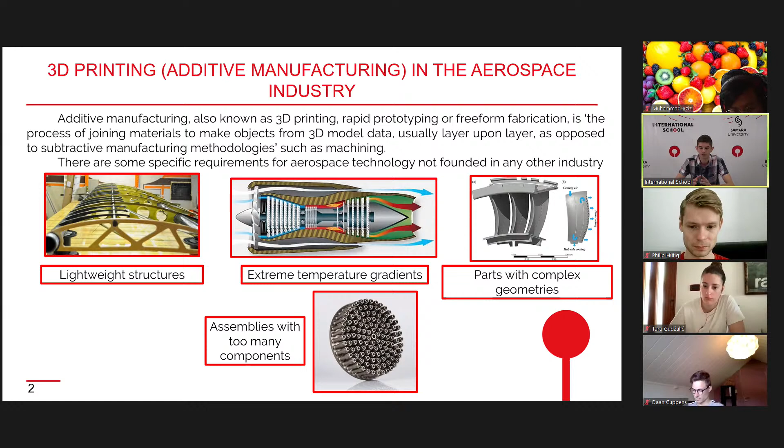Another usage is in the rocket industry or rocket engines, for example assemblies with too many components, like small nozzles for the rocket engine.

Additive manufacturing provides us freedom in component design and lets us fabricate very complex details, complex components or 3D geometry. Following this, complexity can be easily achieved - some features like thin, deep channels and cuts using this technology. In terms of geometry, we can create different types because our 3D model can be divided into small layers, and layer by layer we can create any complex form.

Parts consolidation: traditional manufacturing parts require joining together, but now they can be integrated into a single printed part. For example, if we want to create a nozzle for a combustion chamber, it can be created by traditional technologies, and this detail consists of 3 or more parts. With 3D printing, we can join these parts and create a complex whole detail using this technology.

Fabrication steps consolidation: nesting parts that require assembly in multiple steps can be printed as a simulation. What does it mean? We have special programs to simulate the process of 3D printing - later maybe I will show you this kind of program.

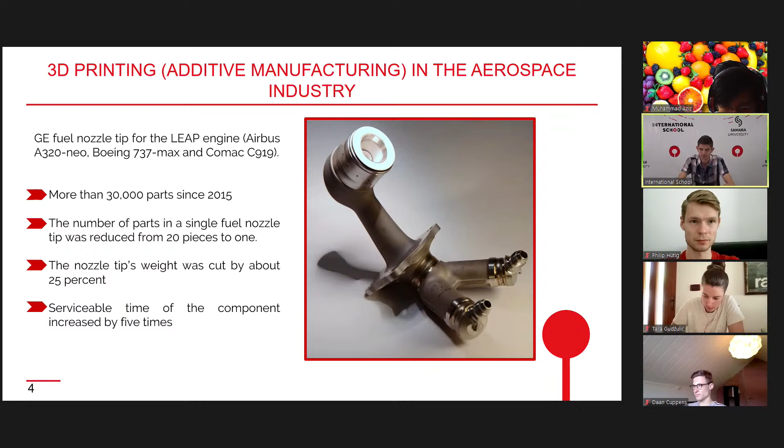Also, the serviceable time of the component increased by 5 times. It means if we want to change a part inside this engine, it will be easy because we can just take out the broken part, print it again, and add it to this engine using 3D printing.

In the rocket industry, maybe you've heard of Firefly rockets. They're using this technology to create combustion chambers for the rocket jet engine. And as you told Philip before, SpaceX also uses this kind of technology.

If I remember, in 2019 they created a combustion chamber for the Crew Dragon spacecraft, and they tested it last year. They tested it, and in April last year, they sent the crew to the International Space Station.

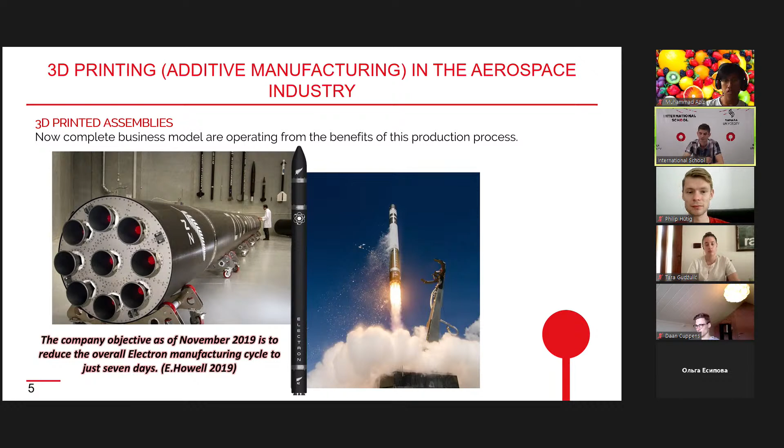As you see, this company SpaceX is progressive, everybody's talking about that. Elon Musk, yes, he's a professional businessman. And as you see, he also found something interesting in 3D printing and uses this kind of technology in his company, because it's advanced technology and useful for this kind of industry, for rocket engines, for example.

In SpaceX, for example, it's totally different from rocket engines that were created 30 years ago. Nowadays they are more complex. Here, the cooling system for these jet engines takes about 3,000 degrees Celsius during the process of burning. That's why we need very strong and innovative materials to create this combustion chamber.

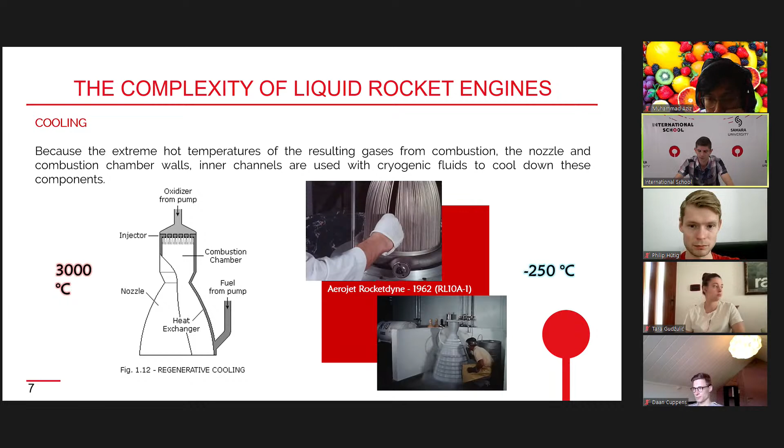Now technology doesn't stop, it improves itself, and now we have 3D printing. Here you see some injectors for the rocket engine. On the right side of the screen, you see our Russian-made rocket engine with a combustion chamber, its name is RD-108, rocket engine 108 in translation from Russian.

Injectors use high pressure gradient, corrosive fuel, and oxidizers, with precision holes. It consists of hundreds of individual components, and the materials are anti-erosion. You see here very tiny, complex injectors on top of the combustion chamber that's used.

Here from the left side you see traditional technology, made by CNC machines. Again, it looks advanced for today's technology. Even so, I am not saying that all manufacturing has been transferred to 3D printing. No, they're still using CNC machines because they're useful to make a useful roughness on the surface of each component.

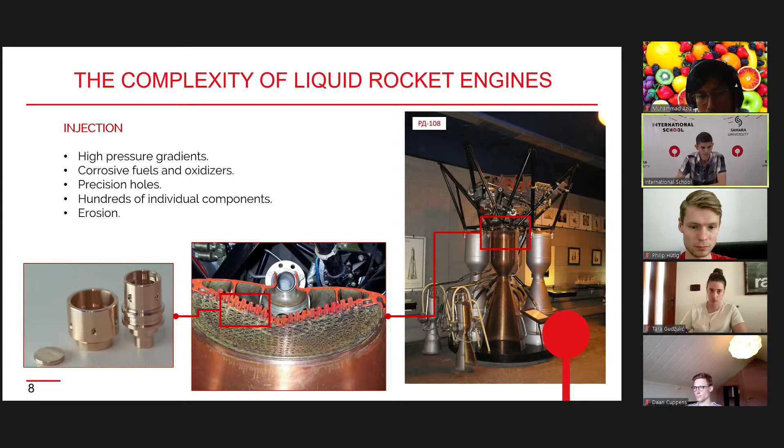That's why people still use 3D printed fuel injectors here. From 2015, NASA used this technology first as an experiment.

Let's see what advantages or disadvantages it has. About disadvantages, I will talk later. Since 2010, different projects have been developed using additive manufacturing. Here you see examples that were made by 3D printing. So about disadvantages, first I would like to ask you, what do you think about the disadvantages of 3D printing?

Maybe you cannot use any material, right? Just some materials, one of it, yes, can be used for 3D printing.

And other disadvantages? You remember I was talking about roughness of the surface. Another one, so what else? It takes a lot of time to print bigger things.

Somehow, but it's more advantage than disadvantage, I'll talk later. The size of the print is totally different, but we can use direct metal deposition. Later I'll talk about it. It's not layer by layer creation.

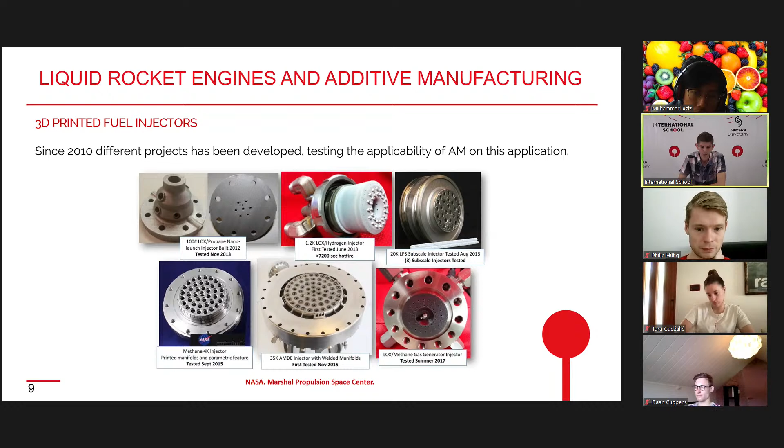This is advantages: time, use of material, and we can create complex shapes, and can also create the detail as one part, joining together some components.

And also burning experiments, one engine in different sizes, it took from 400 Newton thrust to 150 kilonewton. You see how powerful this rocket engine is. Again, they made this experiment with 3D printing fuel injectors. They printed injectors, but I think the combustion chamber was made by traditional technology. I know in some papers they write that they printed just these injectors. Others say that some part of the combustion chamber was made by this 3D printing, but we don't know exactly. They say nowadays they are making totally all the engine using this technology.

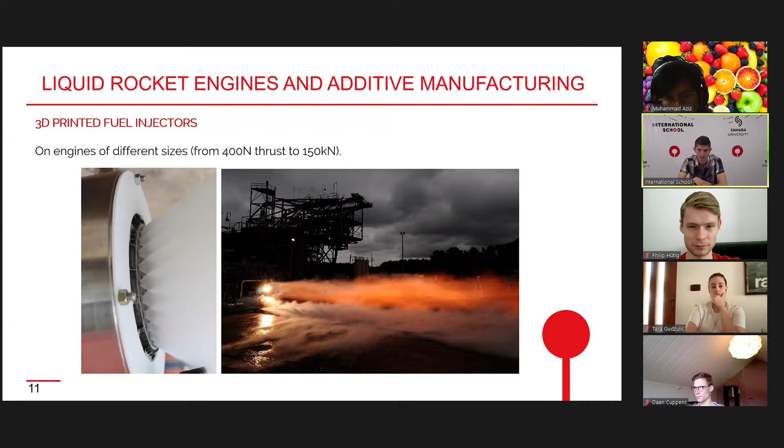About the big size you were talking about, this is a direct metal deposition technology. There's a special nozzle that directly throws the material, here it's metal powder, in all the area, and we can create a bigger diameter. For example, from 20 centimeters it can go up to 1 meter, because the robotic arm moves in direction and puts the material where we need it, building layer by layer.

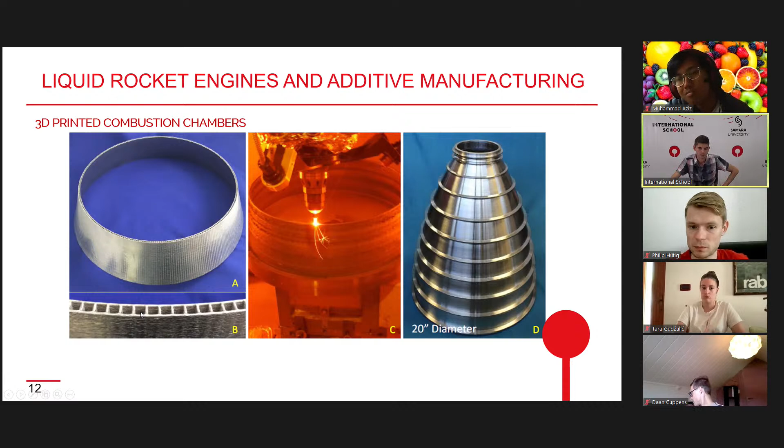Another liquid rocket engine made by additive manufacturing - I think it's Rocket Lab or Firefly company, I don't know exactly. They made a complex rocket engine, and they even printed some pump details and some pipes using this technology, because the geometry was complex. That's why they thought it would be useful to use 3D printing.

Here are some characteristics for that small rocket engine. It takes about 24 kilonewtons of thrust, burning time 150 seconds - that's good enough for this kind of rocket engine. The diameter is 250 millimeters, I think it's talking about the nozzle. Manufacturing process is electron beam manufacturing, which is a type of selective laser melting, a kind of additive manufacturing or 3D printing technology.

Components made by additive manufacturing include the combustion chamber, injectors, pumps, as I told before, some main valves and propellants, and also some pipes were made by this technology. I think it's for directional control of satellites, or for some spacecraft - I don't know exactly, but the rocket engine was made by additive manufacturing, 3D printing.

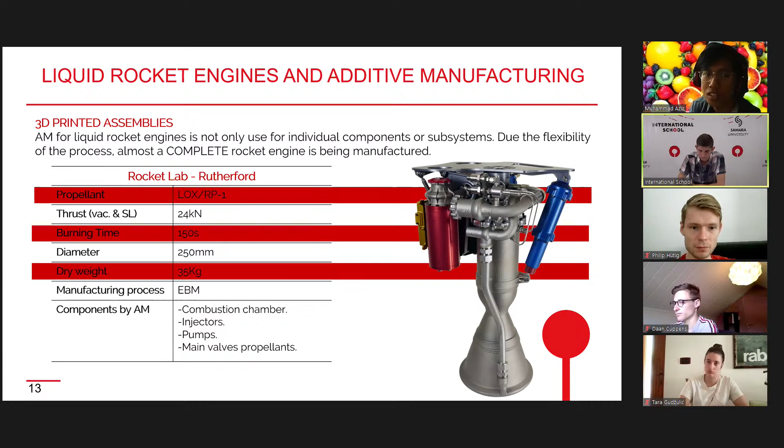Now, in the International Space Station, they tried to make an experiment in anti-gravity - we can call it small 3D printers that worked in an anti-gravity period. I think Japanese scientists made some parts using FDM plastic or some ceramic materials in the International Space Station. They printed 14 objects, including some wrenches, and sent them back to Earth to test the characteristics of the material.

How does it work on Earth? Because as you see, in the International Space Station there is no gravity, that's why this experiment was difficult enough to make. Also the material used in 3D printing was some type of metal powder - I think they magnetized it to put on the surface of the platform, and after that melted it with a laser source of energy.

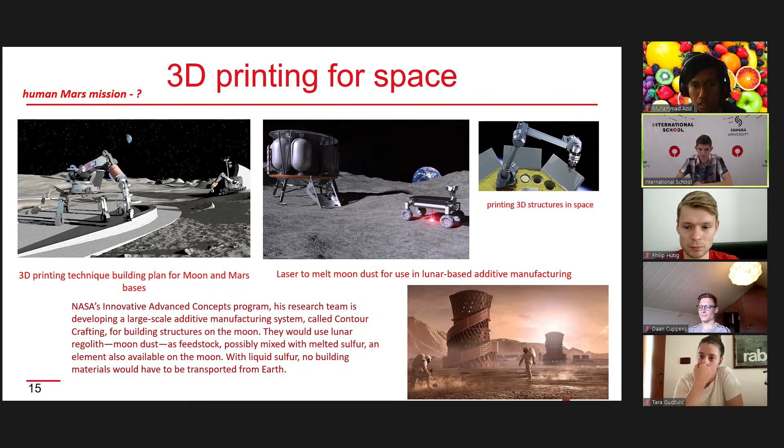That's why we still don't have this kind of mission. That's why we haven't sent a machine to build buildings, maybe even on the moon, the nearest planet to Earth. What else? 3D printing for space.

These machines were also used to print satellite components. Have you heard of CubeSat? It's a mini 3D printed satellite whose frames were printed using plastic FDM technology and sent to orbit. Many experimental satellites use 3D printing. The compounds used were chemically modified plastics designed for the special conditions of space, since it's very cold out there and there's no atmosphere. That's why special plastic and a special 3D printer were used to print these small CubeSats.

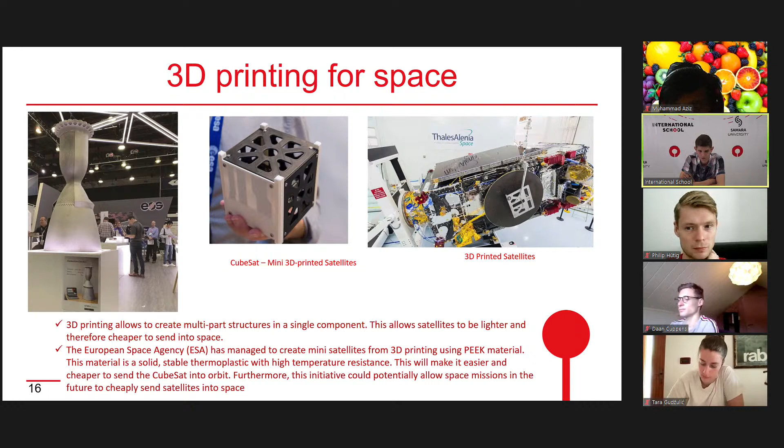The European Space Agency also made a bigger satellite, 2 meters by 1 meter, a whole satellite. Some panels, or rather the frame for the panels, were printed by a 3D printer using selective laser melting technology, printed from metal. From the left screen you can see the advantage. As for the rocket engine, the company that used this was, I believe, from the United States or Germany, I'm not exactly sure. They used selective laser melting technology to create this rocket.

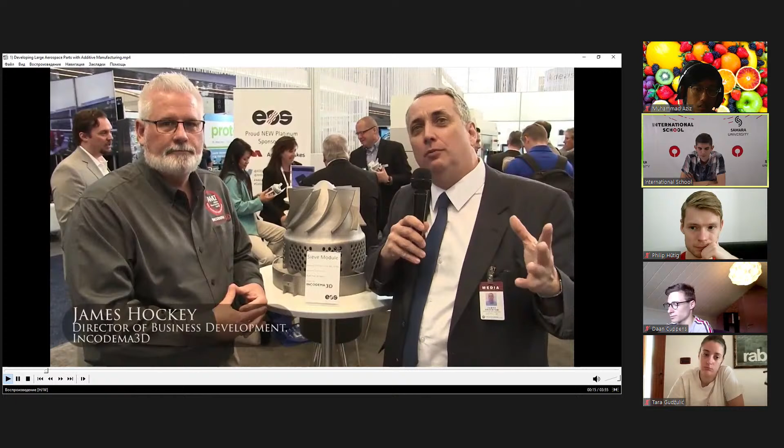Metal additive manufacturing is an amazing technology with tremendous future applications for manufacturing. But if there's ever been one knock about it, it's that you can't make large parts. Now I'm with James Hockey, Director of Business Development for Incodema. Jim, we're standing next to a monster of a metal additive manufactured part. You built this, tell me how.

Yes, we used the EOS M400 machine, single laser. You see, guys, this is the 3D printer I was talking about before, the EOS machine.

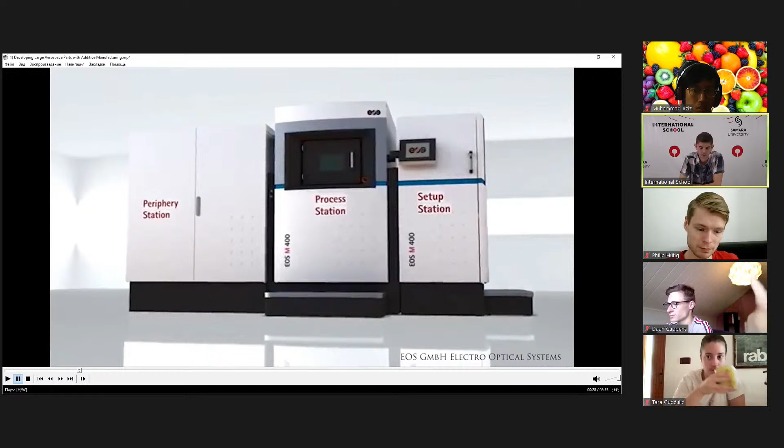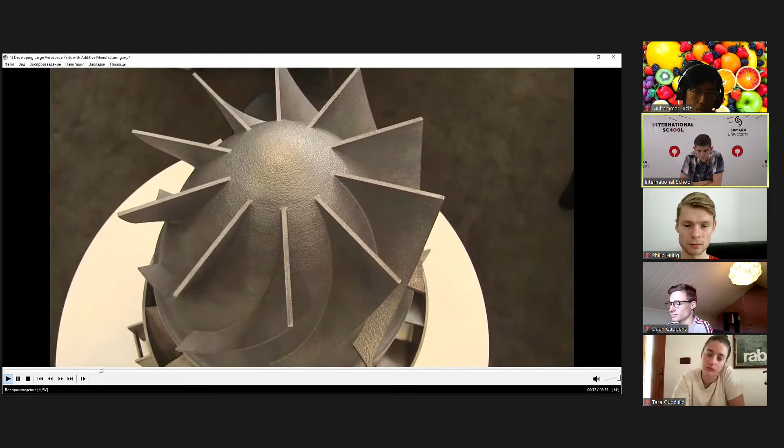The technology is selective laser melting, and the laser is the energy source. It's a 16 by 16 by 16 inch build platform, and we designed this part and stretched it out so we could maximize that build platform and show exactly how large a part you can actually build. This is aluminum. This part probably weighs about 12 to 13 pounds after being built. Very lightweight and solid, fully dense off the plate.

Okay guys, who will tell me what is the disadvantage of this technology? What about the roughness of the surface? Is it good enough?

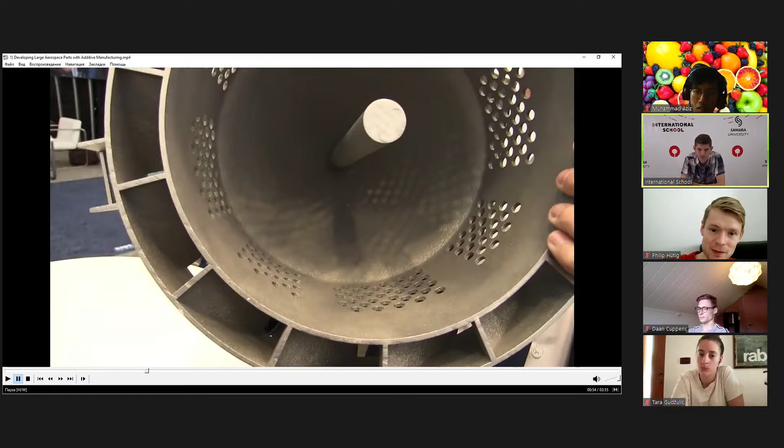Yeah, I mean probably if there's some gas flow through it, it will get turbulent and all these things, I guess. That's why you see there's some roughness. As you can see inside, it is hollow.

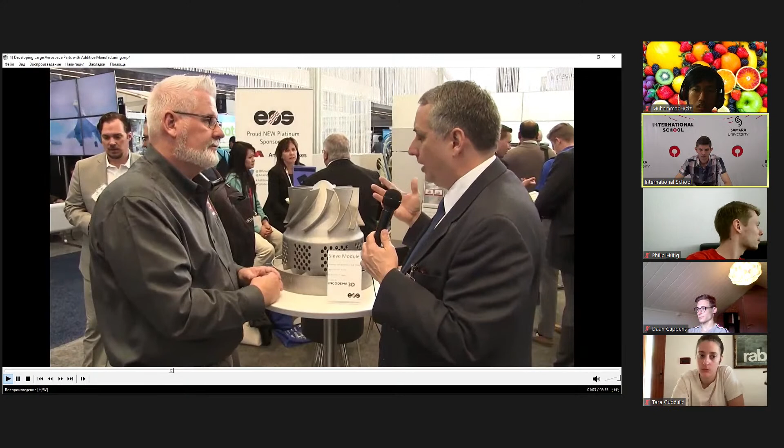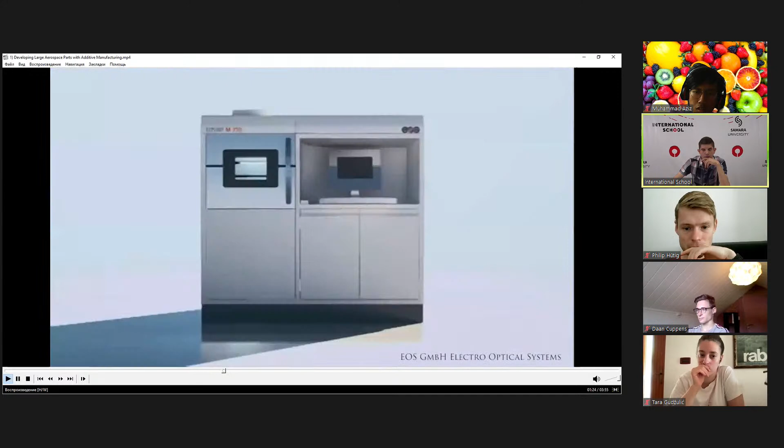It's historically thought of as an expensive way to make things, because you're using expensive raw material to begin with and an expensive process at the same time. But if you're lightweighting, you're also using less material at the same time. So how much of that cost can you win back? Is the cost in time to market? Is it in lightweighting? Is it using less material? Cost is in the build hours. The layer process, the Z, kind of drives the pricing. But again, you're building near net shape, so you're not using as much material. You're not buying a block of Inconel or titanium and machining it down, wasting material. So you're doing finished, fine-tuned machining. Very little material is wasted.

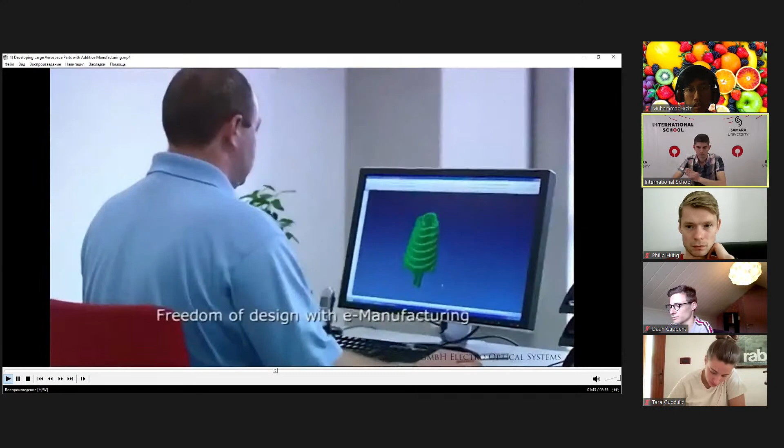Now do your customers optimize the design for additive, or are they bringing you parts originally designed for subtractive and saying please 3D print this? In a lot of ways, they're bringing us parts that are already designed for conventional manufacturing. They are now redesigning parts for additive, so that they are building parts.

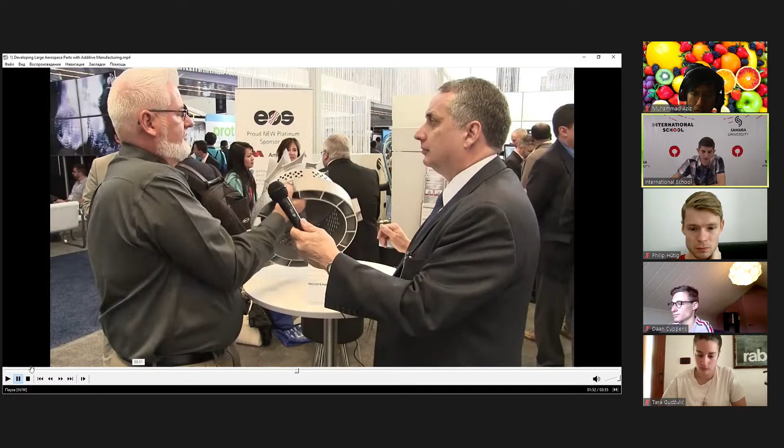You see, guys, here before printing they use some calculations of the structure, in ANSYS maybe you've heard of this, for fluid dynamics. You see the cooling channels that were created, developed exactly for this technology, because these technologies make it possible to create this kind of difficult geometry cooling channels. But before that, we always have to make some calculations.

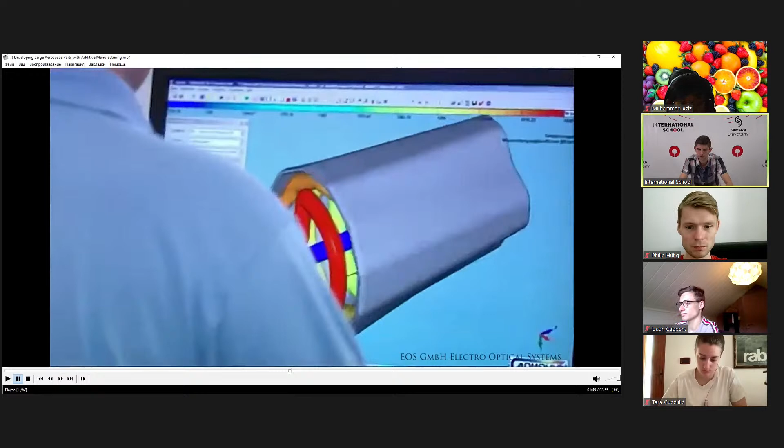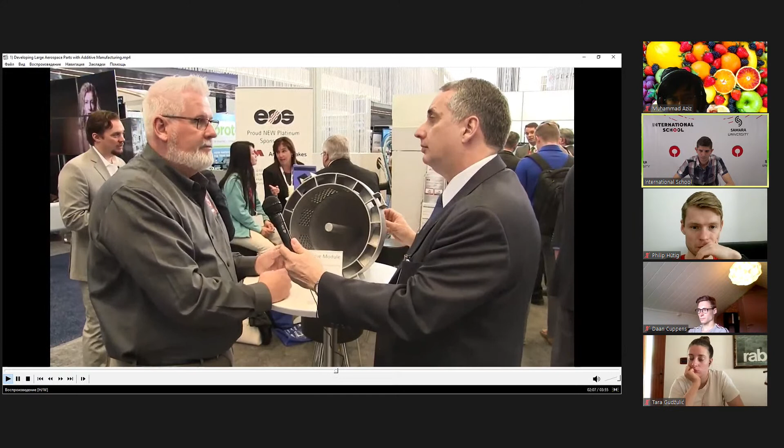So they are building parts with a change to the whole structure and shape, so that you can build these parts in the layer process as opposed to trying to do secondaries afterwards. Now this is aluminum, what sorts of materials typically do you work with at Incodema? Inconel, stainless steel, titanium, cobalt chrome, Hastelloy, many different materials.

Okay, and those materials you described, some are refractory. You mentioned some super alloys in there. You also mentioned some products, I think, of some medical applications, for example. But is aerospace a major market? Aerospace is our major market. We are 95% aerospace focused.

Now in aerospace, of course, it's engines in particular that are expensive. The hot section is really expensive. A lot of investment casting, a lot of tricky stuff, and then you do a lot of post machining at the same time. Is this technology going to work its way into the hot section?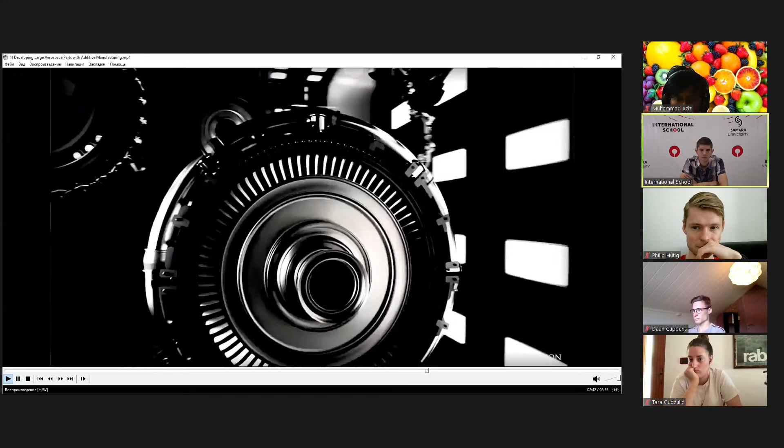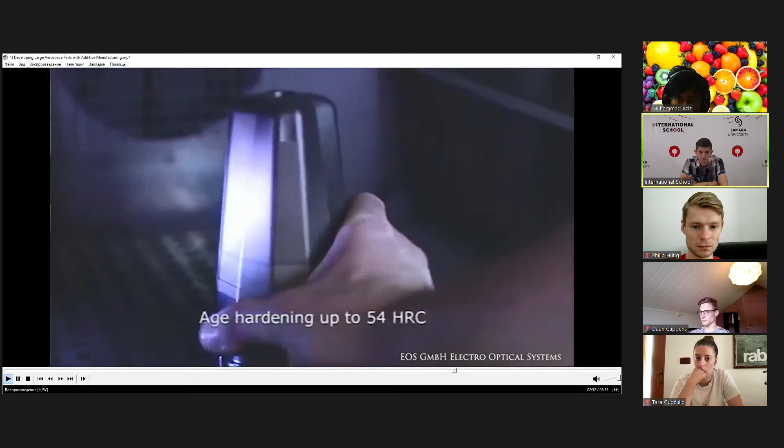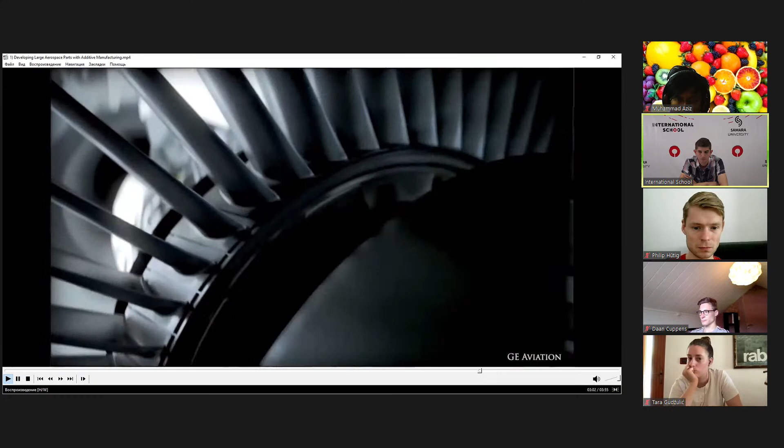Are we going to see fully dense Inconel turbine blades on a mass production basis? We are, and they are there. We are doing parts right now that have actually been test fired by NASA, test fired by companies like Aerojet, using the alloys we discussed. Aerospace is grabbing this because it is difficult to make a lot of these parts by casting or as an assembly. Once they get into multiple pieces and they're doing braze welding, ultrasonic welding, they want to avoid that, redesign and use additive so they can build these parts wholly, holistically in one piece.

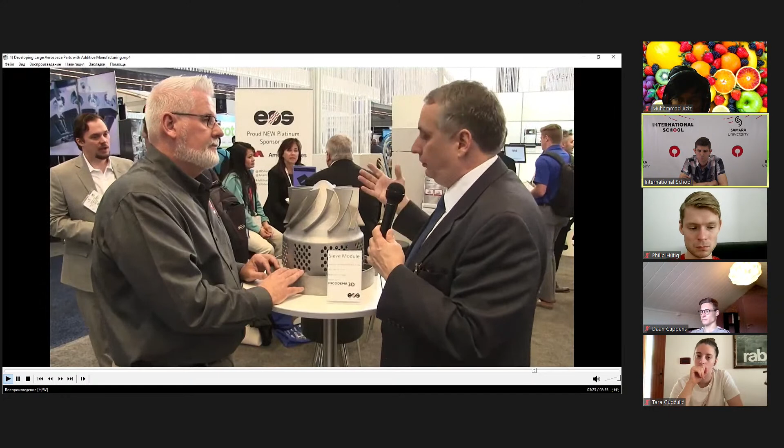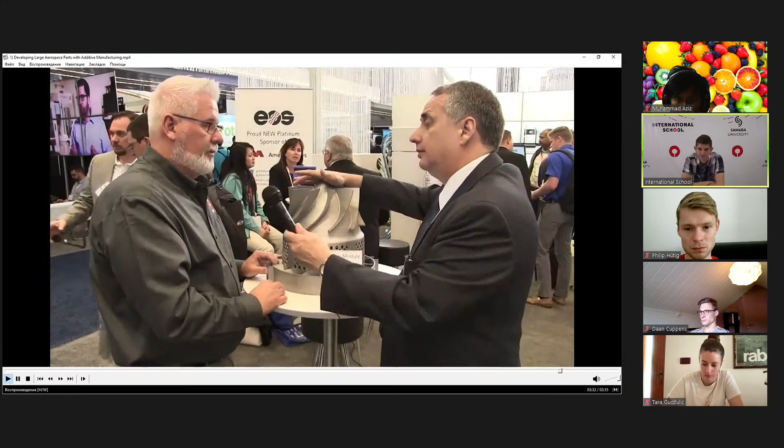Now, in terms of surface finish, historically when you get to very large 3D printed parts, you give away something in terms of surface finish. But this surface is actually very uniform all the way across, so I'm a little surprised to see that. Is this the future? Are we looking at finer and finer surface finish? You will be looking at finer and finer surface finishes. The process of the melt pool, the material itself, the different granule size we get in, and the amount of power we put into the build, into the layers, will change that size and the resolution.

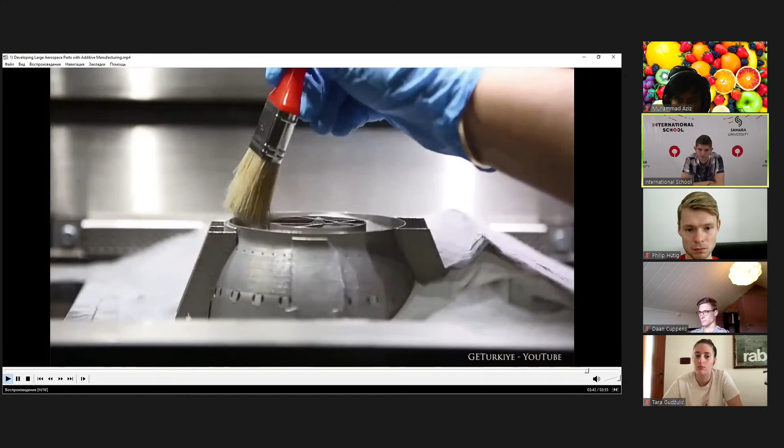Large, precise, and accurate parts with a good surface finish, says James Hockey from Incodema3D.

So you see, guys, that gentleman said they are using this technology to create complex shape forms. There are some disadvantages because of the roughness of the surface. Again, who remembers which kind of materials they used? I mean, metal powder. I think this part he said was aluminum, right?

Yes, and what else? When the interviewer was asking which kind of materials they are using, what did he say? Don't you remember? I think he said several different materials, some nickel alloys like this. I don't remember the name, but stainless steel, titanium, ceramics, and I think he said Inconel as well, like these special alloys.

And you remember he asked why some details, for example for the jet engine, are not made by traditional technologies. What did he answer? Don't you remember? He was asking about the molding, about the casting—there was some tricky thing, if I heard correctly, because there are a lot of very hard, complicated shapes. And he said, if you remember, it takes too much time to make the molding, the casting form, that's why it's better to print it in the 3D printer.

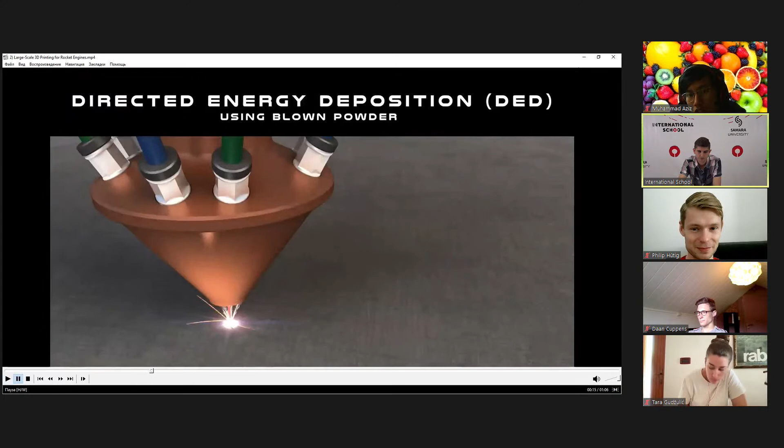Here's a technology called directed energy deposition. You see the big robotic arm that puts exactly the metal powder on the special surface that we need, and we can create large-sized objects. This is a special nozzle. You see the source of energy goes directly in that direction, and from the left and right side it sends the metal powder.

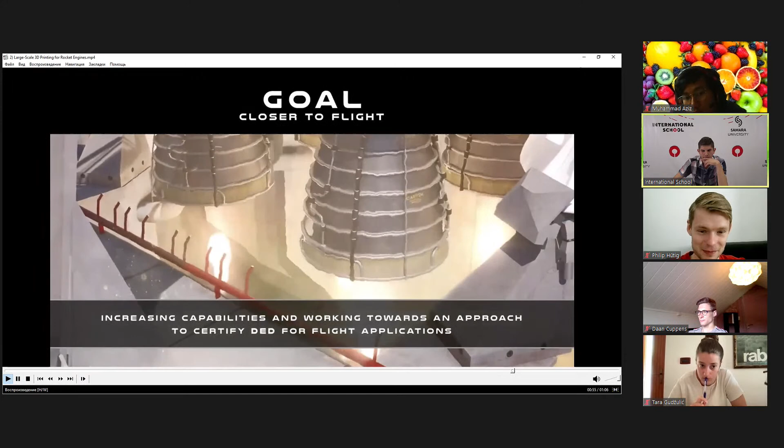So do you have any questions up until this moment about additive manufacturing? I have another small presentation if you would like to hear about it. It's exactly about 3D printing, about the SLM technology. Now I will try to talk about our university's research, what we are making here, and which kind of technology we are using.

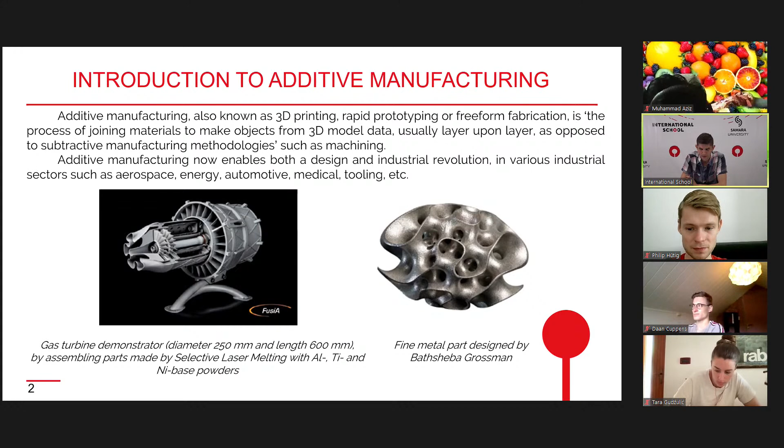So first it starts from the vocabulary, additive technology. This vocabulary comes from MIT University, because they were the first to think of how to use a source of energy called laser power to join material, especially metal powder, and how to compound these technologies to create new parts. That's why additive technology is defined as a process of joining material to make objects from 3D.

So which kinds of additive manufacturing do we have here? It's additive layer manufacturing using a laser source of energy. You see laser metal deposition, short LMD, direct energy deposition, DED, and powder fusion. Most of these use metal powder. Selective laser melting, this technology we are using in our university, direct metal laser deposition, and also electron beam melting.

So what we have to know for additive manufacturing technology, we have to create our 3D model, and this 3D model we can make in different kinds of programs. It can be SolidWorks and NX.

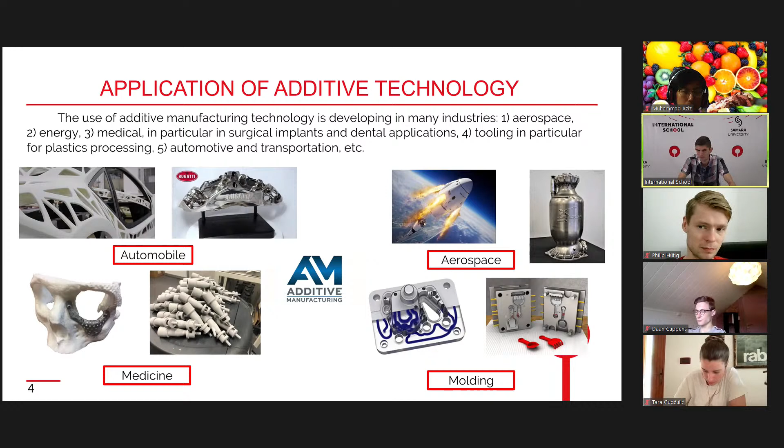In automobiles, super cars like Bugatti have printed brake system parts from titanium. They used SLM technology. You see, it's not just very advanced for the aircraft segment, but also in many kinds of manufacturing we can use this kind of technology.

And the process, how it occurs: the powder bed manufacturing cycle. On the bed platform, as I told you before, we put a small, tiny layer of metal powder, and after that, by a special trajectory, the laser melts and creates our future model. It's called fabrication modeling.

And yes, another question to you. Let's think about it. Which explanation is better for 3D printing? Because, in my opinion, when you say printing, you think of printing on 2D paper. We can call it manufacturing, we can also call it fabricating. Some people say it is growing, but growing is more for natural things. What do you think? Which word, which explanation, is better for 3D manufacturing or 3D printing?

Sometimes we are manufacturer, sometimes we are fabricating. Some people call it more 3D fabrication, 3D manufacturing. In your opinion, which one is better? Or let's talk that it's 3D printing, it's better.

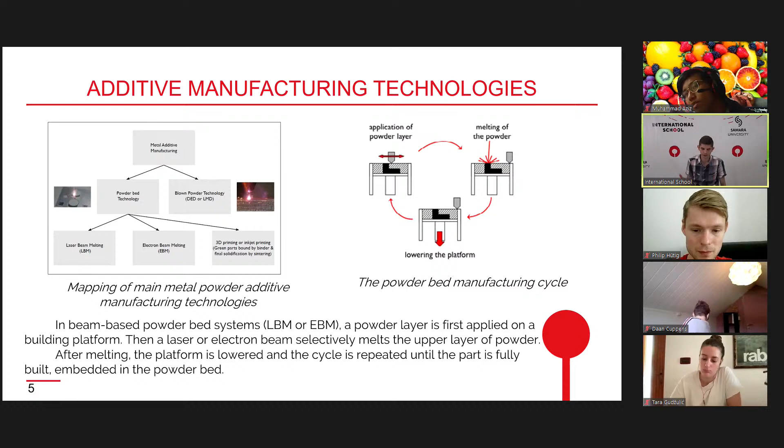To print something, there are some disadvantages, which I will talk about later. Somehow you have to change even your 3D geometry exactly for the 3D printing, to change some holes, to change even geometry, to achieve a better construction. I will show you how.

This is equipment that we have in our university. It's a German machine called SLM 280. The numbers on this machine represent the size of the build platform, the maximum size that we can create using this equipment. 280 means the width and length size is 280 millimeters, and the maximum height we can build up is about 350 millimeters.

So it consists of three main blocks: the operating system, or laser unit, the printer controller - the computer, the brain of the machine - and the build chamber where the process occurs. Here you see inside the chamber, it's a build platform with the detail on the surface, and a powder sieving station.

The plus of this technology is that the powder we are not using during printing, we can sieve it and use it again. So there is no extra bad material like in CNC or cutting. There is no extra material that we are throwing out - we can renew and reuse this powder. That's why it's a plus for this technology, we are not throwing out extra material.

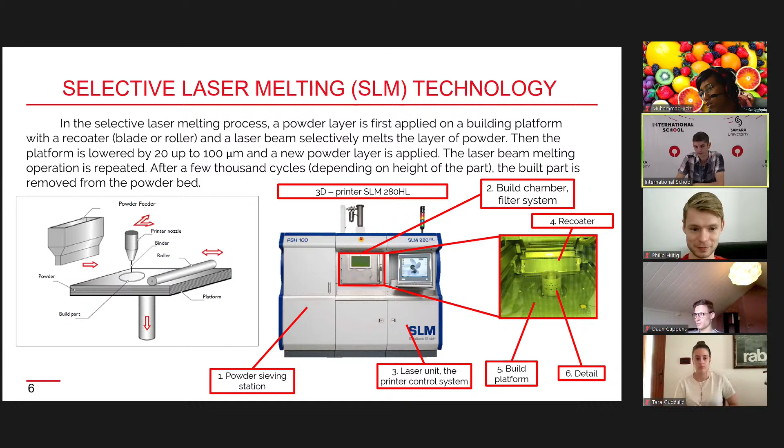Some features for the 3D printing: there is a formula that we use to find out the best parameters for laser power. Source power is the laser, and to find the best parameters we use this formula where P is the laser power in watts, V is the scanning speed, the speed at which the laser moves on the trajectory.

H is the hatch distance, the distance between melted tracks of our laser power. And T is the thickness of the layer. The amount is equal to energy density, how much energy we need for each material. For aluminum it's for example 50 joules per millimeter cubed. For titanium it should be greater to melt it up.

We have to find the balance between these parameters, because if we put too much energy we might evaporate the material so it won't even melt on the plate. The metal powder secures its absorption of energy - it can reflect some percent of energy and scattering. The size of the particle varies between 30 to 50 micrometers.

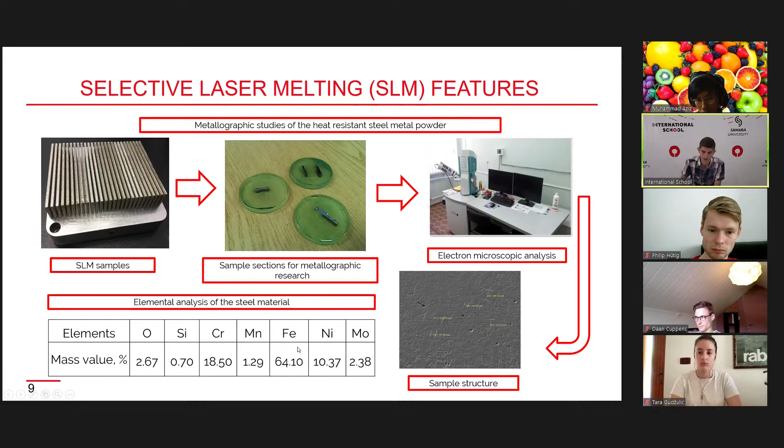This is the percent mass value of the compound of this sample. It has oxygen, chromium, manganese, ferrum. You see it consists mostly of ferrum element, and again some nickel and molybdenum compound.

After that, when we made the experiment, we choose the best parameters, and we can create our part. Here is a section of a blade turbine jet engine nozzle. We changed some geometry, for example the deflector and the blade, and the cooling channel geometry.

Why did we do it? Because during the manufacturing process, our 3D printing program automatically builds up support materials. It's needed to support our structure because, as you know, our detail is growing through this process, and we need suspended or inclined surfaces supported with a special structure. These support materials are made from the same material as our future details.

So we optimized a 3D model of the nozzle. We put inside here, if it's visible to you, a small cell block. The section of the small cooling tiny channels was also changed, and the deflector was put inside the turbine blade.

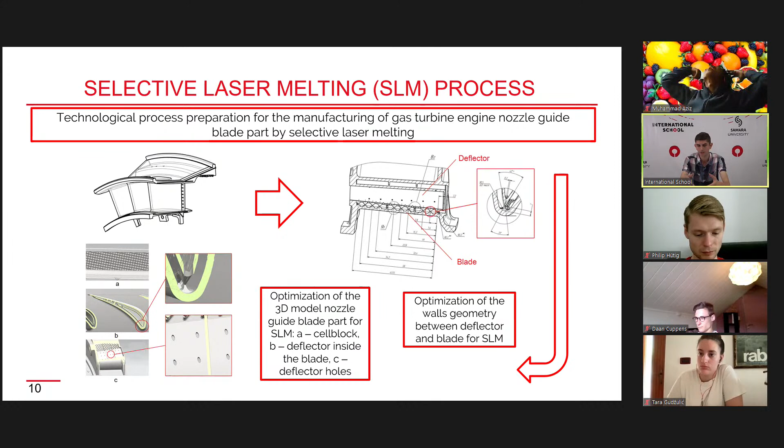In traditional technology, it takes too much time and it's hard to create this blade. Why? Because first, using molding technology, you make the shape of the blade, and after that, separately, you have to make the part called the deflector with small cooling channels, and after that you put it inside the blade. But here, we made it as a complex single form using 3D printing.

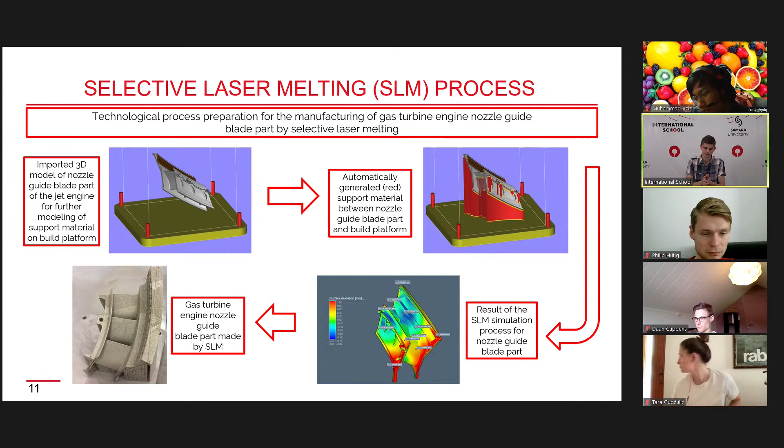As a result, after all these experiments in additive technology, we found out the best parameters for the laser source. We changed a little with the geometry to print it. We are creating special support materials to make it more functional, to support our structure, and after that easily cut it out from our build platform without any difficulties.

And again, we can create a short production cycle time with complex parts, joining 3 or 4 components and melting it as one complex shape, for example a blade, in this exact experiment. So this is how selective laser melting works. Do you have questions, guys, for this, up to this moment?

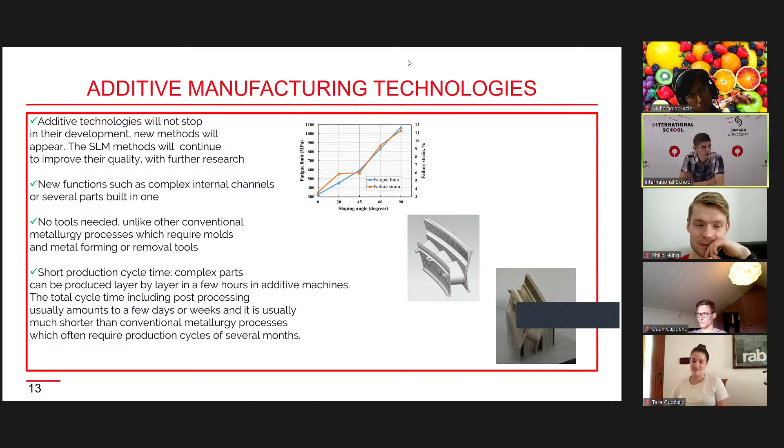Okay. It was very interesting, I think, for you, these lectures. You found it interesting for this process.

Let me give you some small homework, a home task. You see the chat of our Zoom, I'll send the link to you. From this link, you have to download a special program called Autodesk Fusion. I heard that some of you used Autodesk programs for modeling, for this kind of 3D modeling.

In this program, you have to make a topologically optimized design. I will show you a short video how to make it, but first I will send you a link. You got it?

This is the official site for Autodesk Inventor. And the program that you have to download is called Fusion 360 NetFab. This is the program. Now let me demonstrate what exactly you have to do. There are short videos.

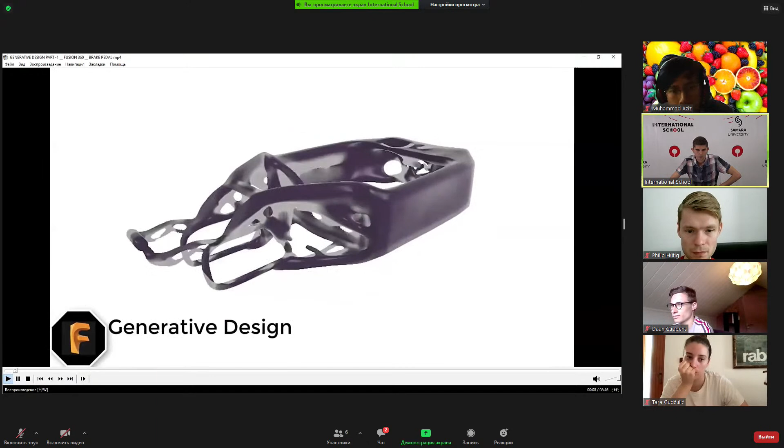World of Fusion 360. In this video, we'll explore generative design in Fusion 360 - not just a little, you have to make some generative design. You can change any structure that you want, or use your own. We're going to generate a design for a brake pedal. Without further ado, let's get started.

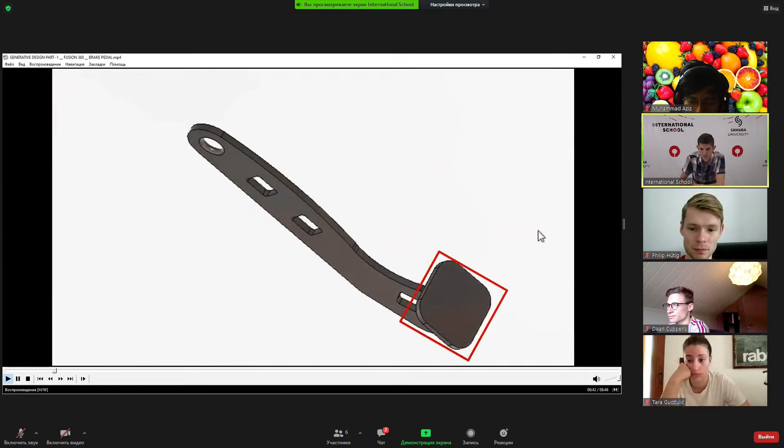So here we are. Before switching to the generative workspace, we have to focus on two areas: one at the pivot, based on which the pedal rotates, and the area at which we apply force. These are the main areas we focus on, and the rest is for reference only.

Let's look at the properties for this pedal. The mass of this pedal is approximately 229 grams. The material is steel by default, but we are going to manufacture it with titanium.

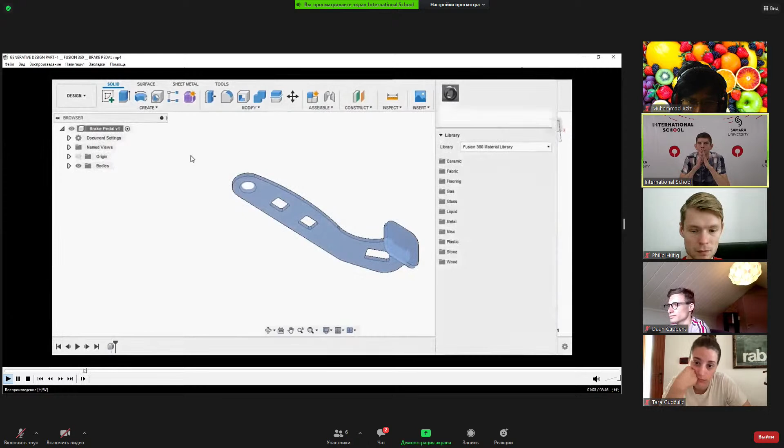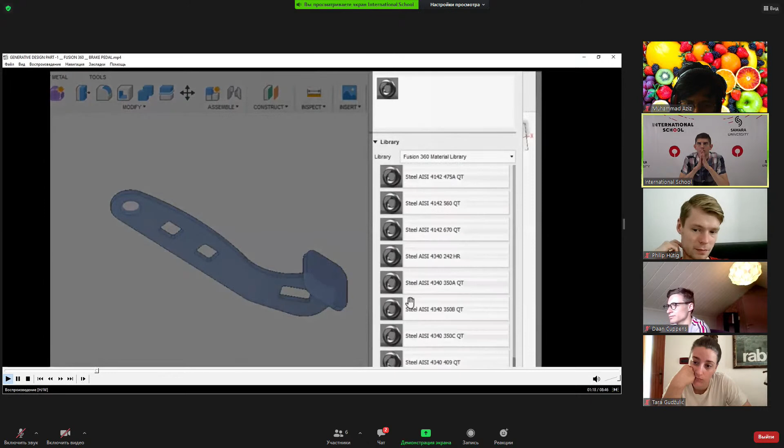Let's go and change the physical material for this pedal, though it doesn't affect the generative design. In metal, scroll down and select titanium.

Now switch to generative design. Let's have a look from the top. You can learn all about generative design by clicking on Toggle Learning Panel if you want. We have a new generative study option, but we have one already here by default. Coming to study settings, what we want to focus on is increasing the resolution for better results - just a bit - and click OK.

Moving forward, click on Edit Model. Under Model Components, inside Bodies, we only have one. For a generative study, we must have more than one body - that is for preserves and obstacles.

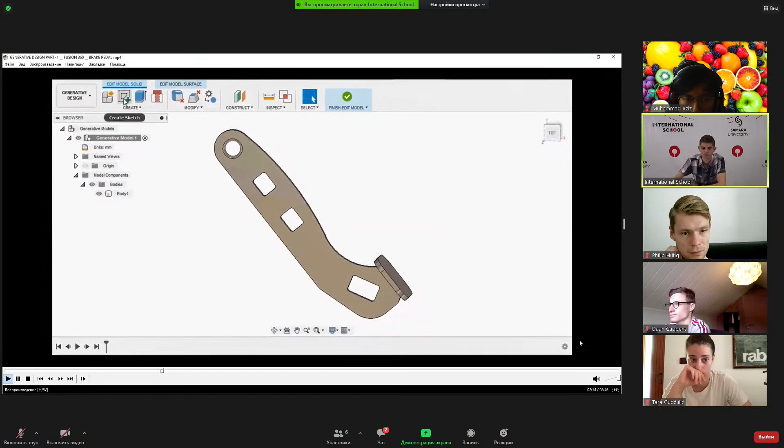Create a sketch on the pedal face and select the face, then press P to project the face. Finish the sketch and select the sketch to extrude. Select the opposite face as distance, and change the operation to new body.

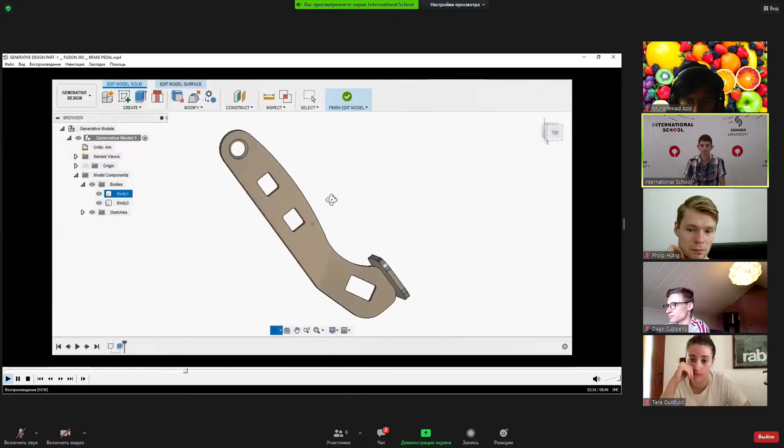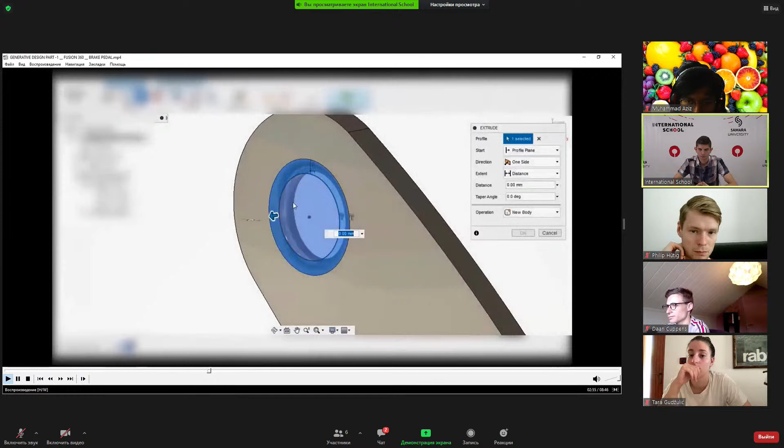Let's create another sketch on this face and project the circle again by pressing P. Perfect. Offset the circle 2 mm inside and finish the sketch. Select the profile, not inside, and extrude the other side. Change the operation to new body and click OK.

Now we have to tell the software not to fill material where we don't want it, particularly at the connectors such as bolts and nuts. For this model, a bolt will be at the pivot.

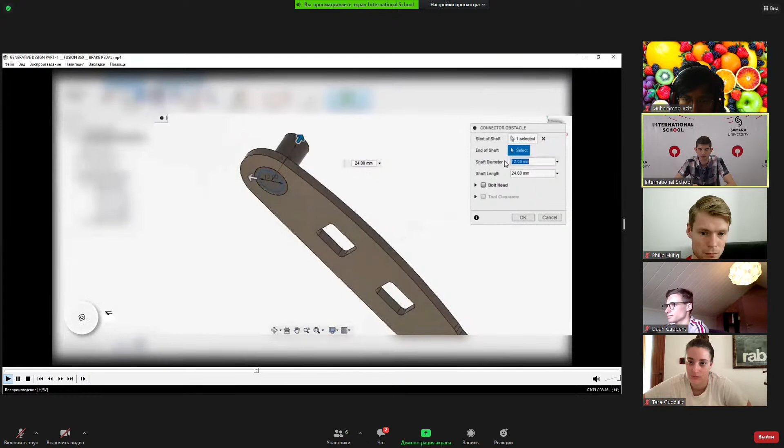Click on Connector Obstacle and select the inside edge. You'll observe that a shaft through-hole is passing to the other side. Just by adjusting the parameters inside the dialog box, you can get our connector. If you observe here, it created a shaft diameter of 12 mm - I want to change it to 11.85 mm.

Now click on bolt head. Enable bolt head on both sides, adjust the shaft length from 24 to 4 mm, and similarly set head length as 10 mm.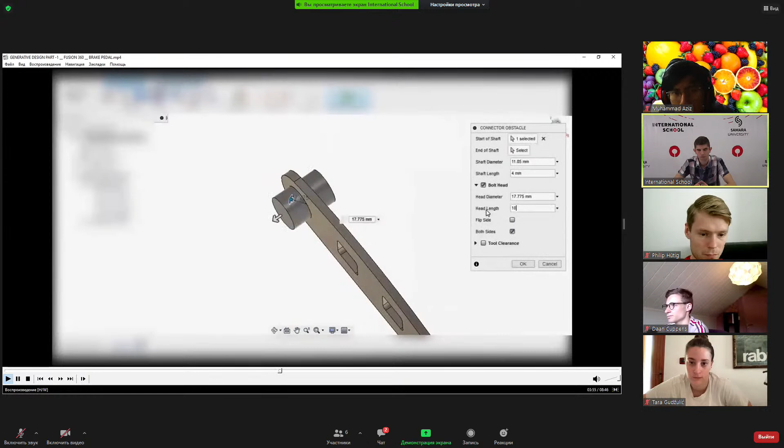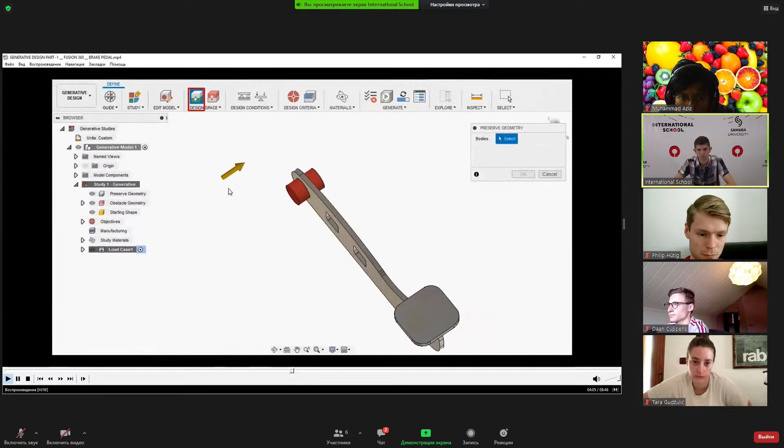Let's go ahead and finish the edit model. Select preserve here and choose the geometry that we need. Select the pivot and the body on which force acts. We have already selected obstacles, and we have created a connector obstacle.

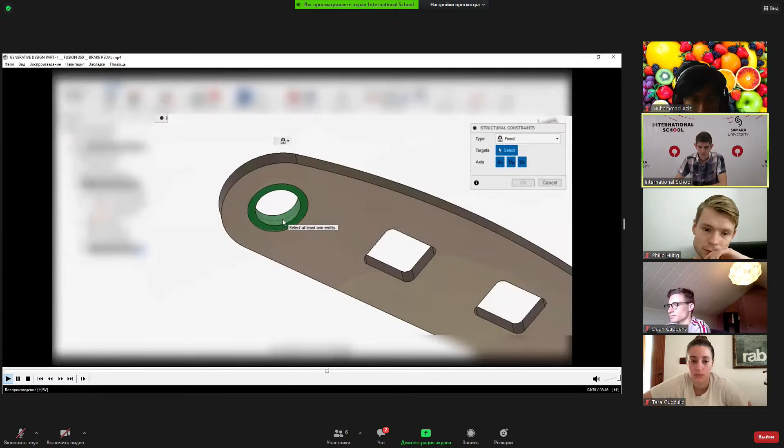Coming to the structural constraints, let's hide the obstacle geometry so we can see the pivot - the face to be fixed. In the practical world, we apply force on the pedal and the pivot rotates in only one axis; the remaining two are fixed. This is only to some extent because of the spring - at the extreme point, it won't rotate. We are considering that extreme point and fixing this face in all directions.

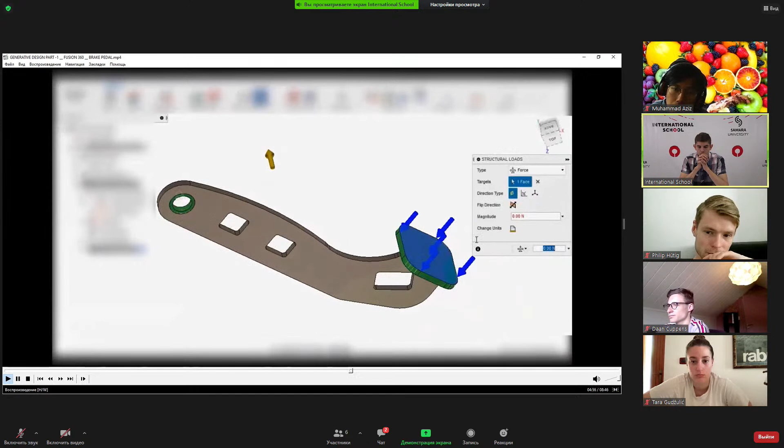Apply force on the face, and let the amount of force be 2000 newtons. Here comes the objectives for our requirement.

We can choose minimize mass or maximize stiffness by varying limits such as safety factor and mass target. For now, I'm going with minimize mass.

Coming to manufacturing. Unrestricted will allow the machine to generate an organic design. With additive, we can 3D print the part by overhang angle and minimum thickness parameters as base.

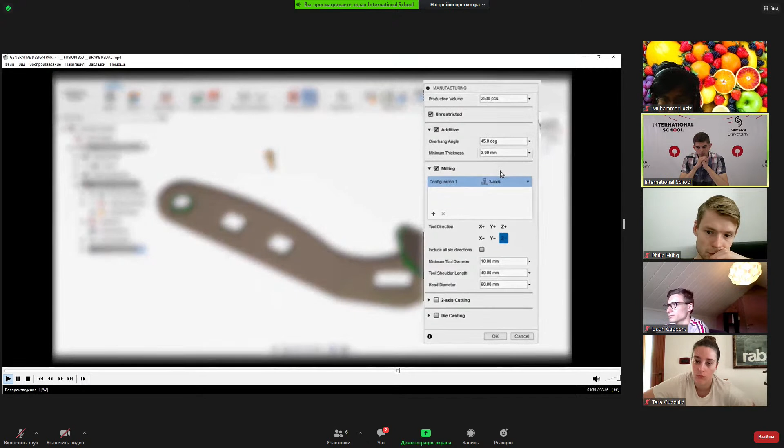In milling, we have 3 axis, 2.5 axis, and even 5 axis. This design is not supported from 2.5 axis machining. Let's add 5 axis machining by clicking plus sign in here.

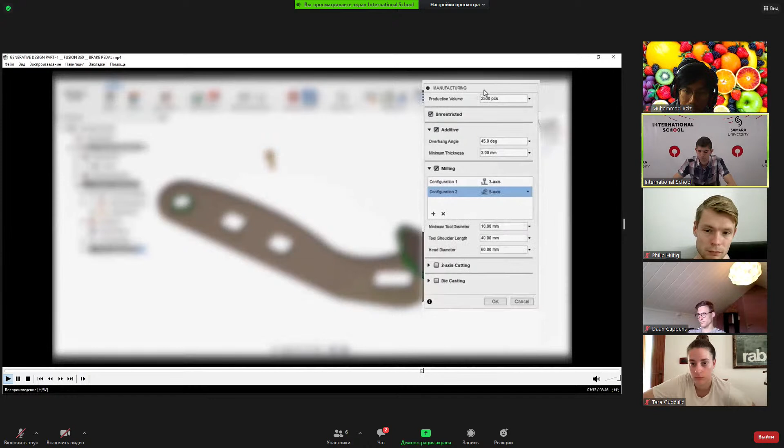In 3 axis, switch the tool direction to Y positive and click OK.

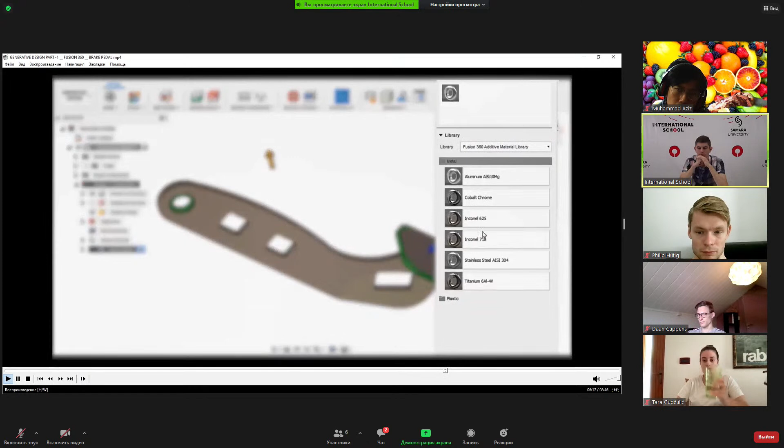Choose the material for study. We have many materials in here. I'm adding titanium and Inconel 625.

Oh, we got a warning here. It's telling that the head diameter is large. This is because the model is inclined. Let's go back to the design workspace and rotate the model to fix it.

Select body and press M for move and rotate. Let's rotate this body to 45 degrees and switch back to generative workspace. Now observe that everything seems perfect.

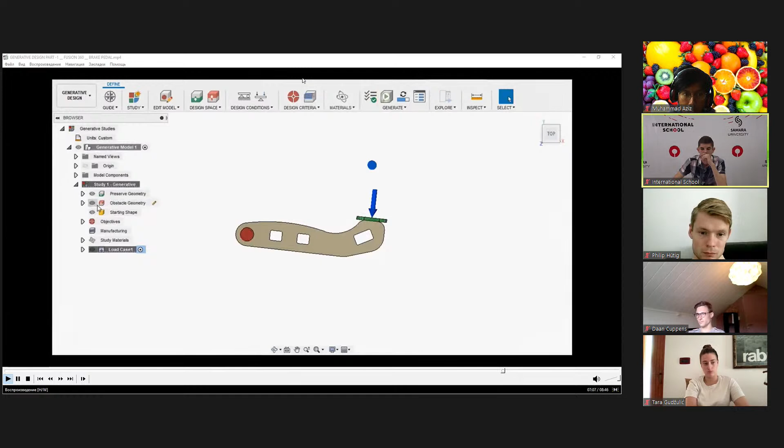Holding the gravity about 90 degrees by changing the direction type. Let's have a preview. The preview is not what I want actually.

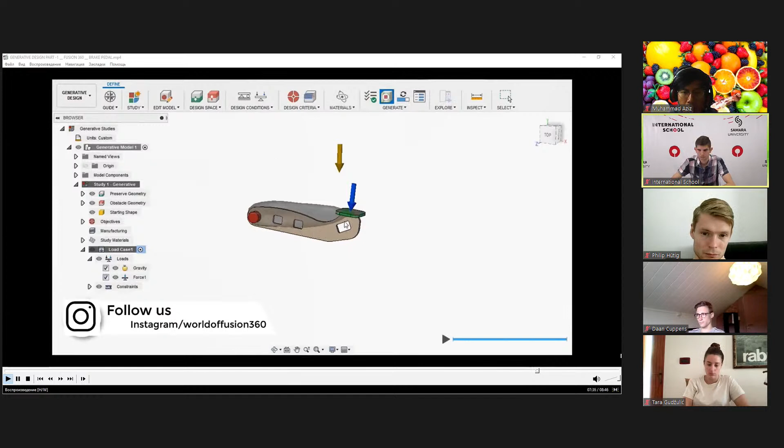I want material to be added in this direction. Let's go back and edit the model.

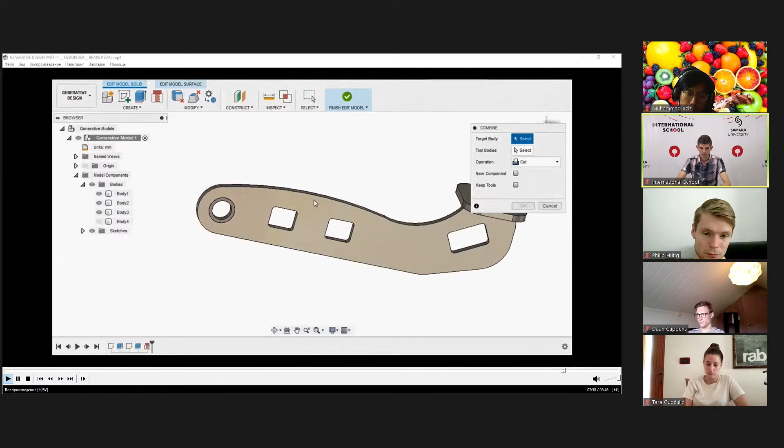And in combine, change operation to cut. Select the main body as target, pivot and pedal as tool bodies. Check the keep tools and click OK.

Edit the starting shape and select the main body. This warning is because we've added the bodies in design workspace. There is no problem with that, but I want to view them back now.

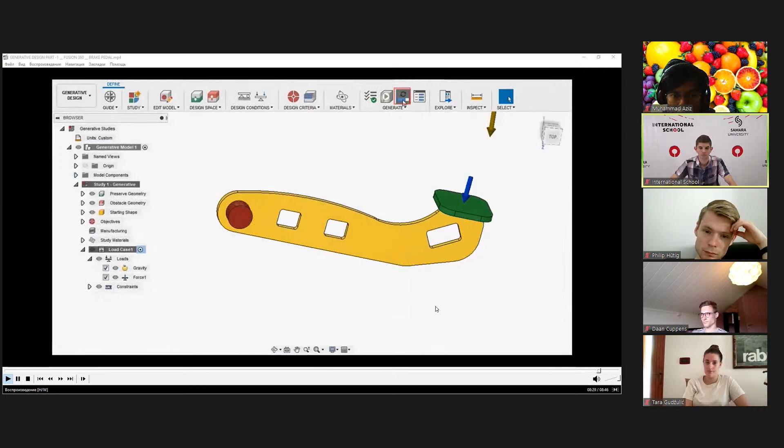Generate the design. It takes some time to generate output. We'll explore the generated results in the next video.

You see which kind of calculation he did. Firstly, the movement of this part, how it will be situated, the fixed point, where that pedal will move, in which kind of directions. He chooses the direction. He chooses the force that will be used.

So you got the model in the chat. Is it visible to you? It's called break output version 1.3 F3D. And now I'm sending the video. So do you have any questions till this moment?